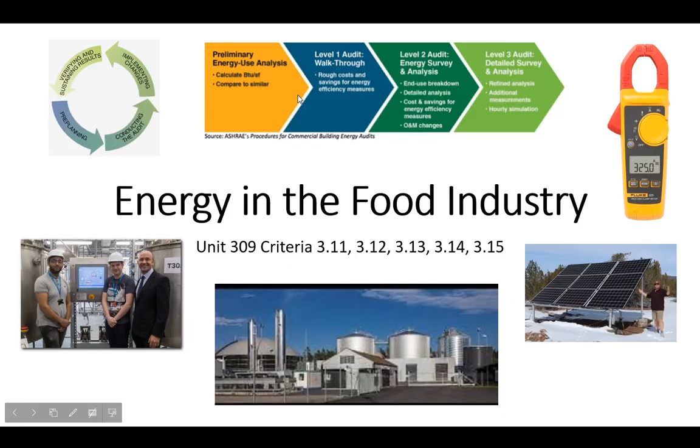There we go. These are the different criteria which we're going to look at. Describe the energy audit process within a food and drink operation. Explain the sources of energy losses in a food and drink operation's building. Describe the methods used to reduce energy losses. Describe methods used to monitor energy losses and consumption. Explain the financial impact of inefficient systems. So most of it, I think, is almost common sense stuff. It's not really an awful lot to cover or to dig into, but we're going to do a little bit, obviously. Just to anticipate a few things.

So normally, whatever you do, it doesn't matter what system you have, you always look at the energy consumption, especially nowadays, and also the energy cost has risen quite significantly compared to 20, 30, 40, 50 years ago, when energy was relatively cheap. Oil was cheap, gas was cheap, coal was cheap in comparison to what it is today. And electricity with that was cheap as well, a lot cheaper than what it is today. And so, especially with modern technology, you can reduce the amount of energy you lose, and straight away this would translate into profit. And it's a box standard equation.

You spend £100 on, for example, seals for your pneumatic valves, and you put them in as part of your normal plant preventative maintenance, your PPM routine, and suddenly you realize you don't lose as much energy, pneumatic energy, therefore the compressor doesn't need to work as hard, and you make savings straight away. And so maybe you spend a couple of £1,000 on these seals and the work you do, and you can almost calculate that after about a year you get money back out again, and then it's profit. So once you've broken even, it's just pure profit you get out of it.

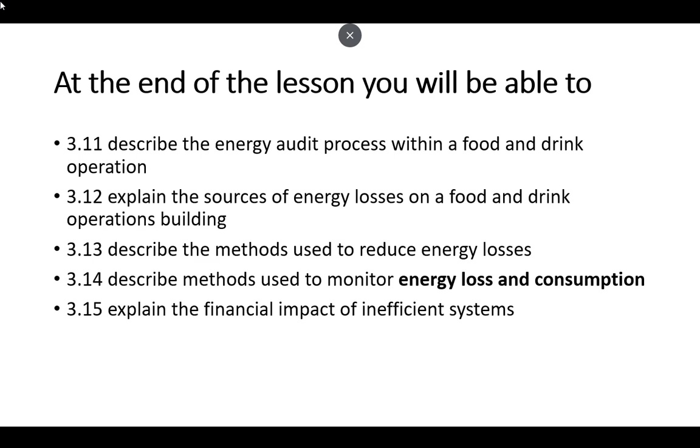Okay, the energy audit. We've got a fancy diagram here, and we've got verifying and sustaining results. So where are we? Okay, so first of all, you conduct the audit, then you implement any changes. So you audit, what is your energy consumption, what are your projected losses, then you provide some changes, and then you verify and sustain results. So you can then see whether it actually makes a difference, and then based on that you can carry on planning, and you can do this all as part of your PPM routine, planned preventive maintenance routine, and with that try and keep the energy consumption at a minimum.

Results should be: understand the energy being used, identify energy losses, do an analysis of losses, then obviously try to reduce those losses and recycle energy otherwise lost. And a good example is heat, which you could recycle quite easily. You capture the heat, you may have a heat exchanger. You might use it for heating parts of the building, especially in winter time, or you could use the heat for other bits. And it's happening. It's done all over. We've seen in power generation, when we've got coal-fired power plants, that heat is recycled. So the heat from the water that's been turned into steam is recycled and is used for other purposes.

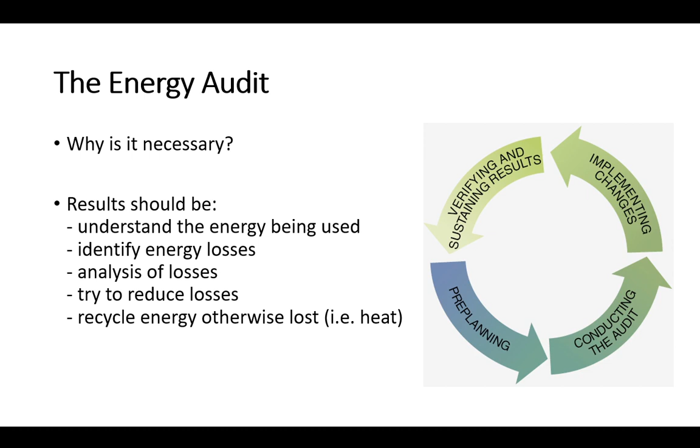Okay, just the same diagram which we had a look at before. I'm going to leave it up for a moment, and I can have a sip of tea. Okay, so we looked at this before. Okay, and we're going to move on.

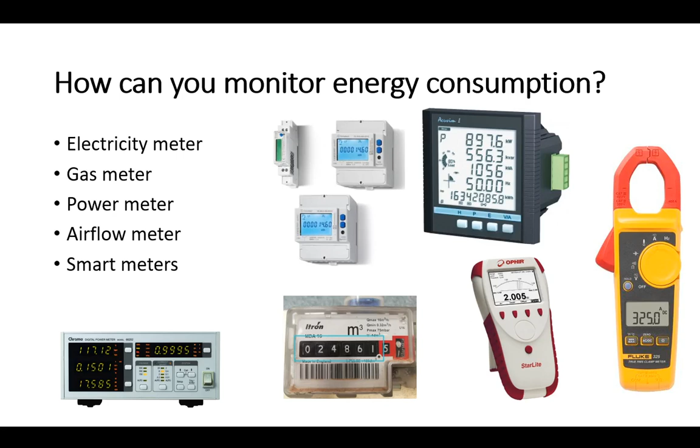looking at the heat that is produced, and possibly siphoning off some of the heat for forging steel to heat the offices which are connected to the plant, and maybe the plant itself, if it is necessary.

And then also, if you do some changes in the production process where steel is not allowed to cool down before the next production step takes place, you could then again save a lot of money. So potentially, when you add all those figures together, you might be looking at about 60, 70, 80,000 pounds you could save, and that's a lot of money.

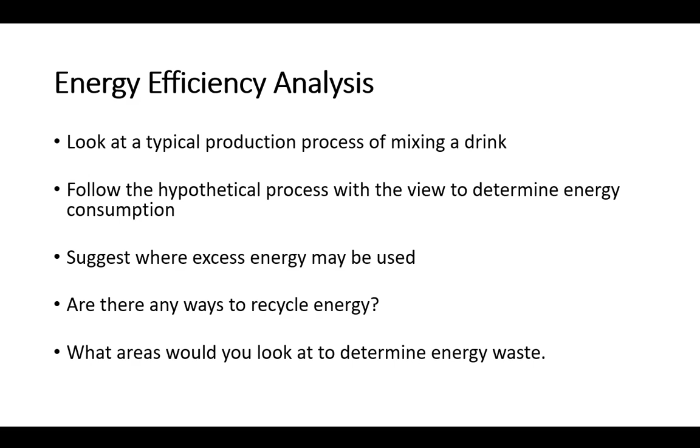Okay, look at your place of work or PMC or your home and do an analysis about your current energy consumption and savings. Again, just bullet points, don't go crazy. I just want you to think about potential energy savings to increase efficiency. For example, I gave you an example with my home here when I'm just looking around. Obviously, all I can do is just guesstimate. I can't calculate how much money I'll actually be saving.